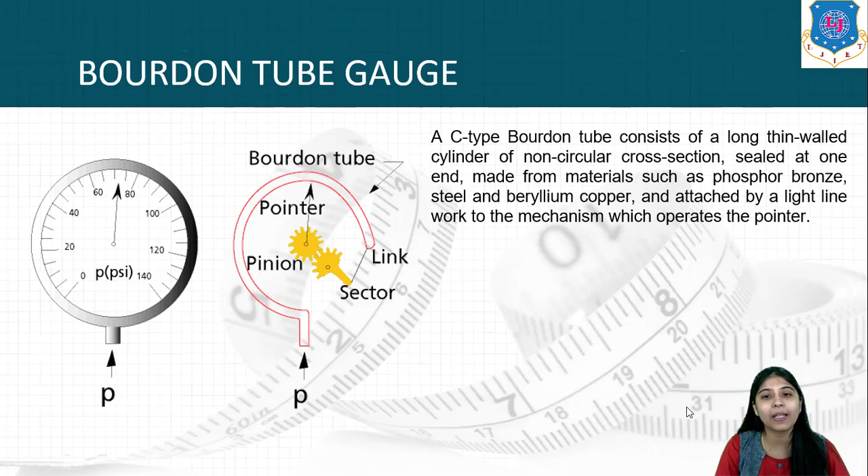A C-type Bourdon tube consists of a long, thin-walled cylinder of a non-circular cross-section, sealed at one end, made from materials such as phosphor bronze, steel, alloy steel, beryllium copper, and attached by a light linkwork to the mechanism which operates the pointer. The other end of the tube is fixed and is open for the application of the pressure which is to be measured.

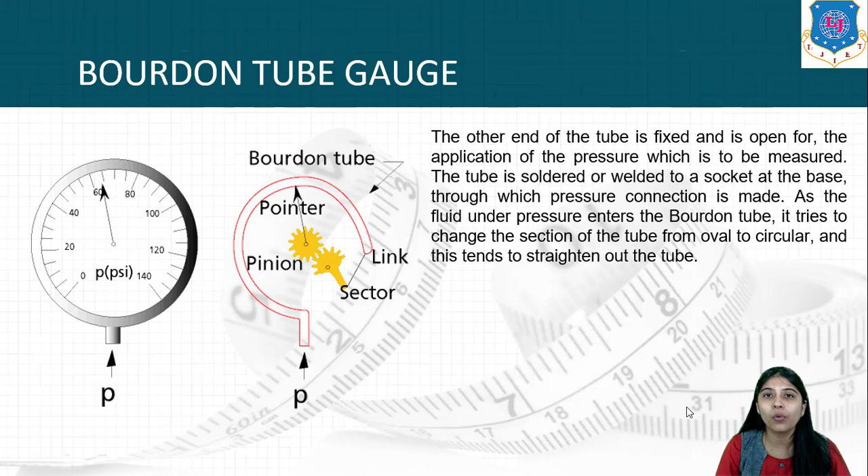The tube is soldered or welded to a socket at the base through which the pressure connection is made, and as the fluid under pressure enters the Bourdon tube, it tries to change the section of the tube from oval to circular, and this tends to straighten out the tube. The resulting movement of the free end of the tube causes the pointer to move over the scale.

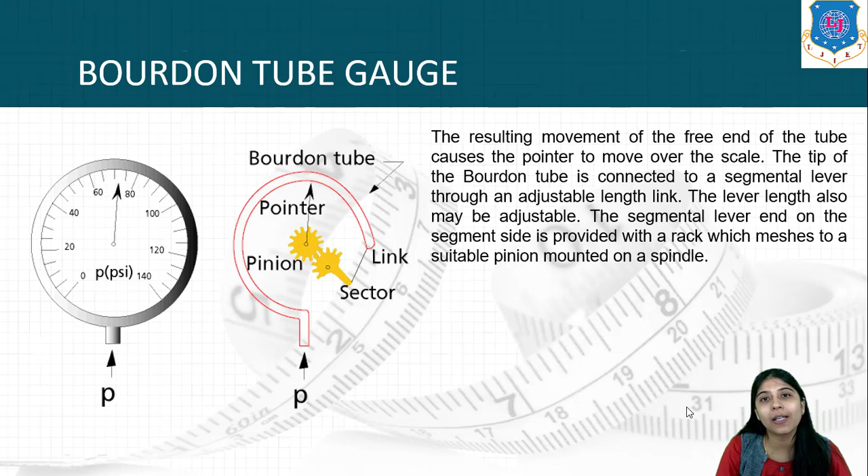The tip of the Bourdon tube is connected to a segmental lever through an adjustable length link, and the lever length also may be adjustable. This segmental lever end on the segment side is provided with a rack which meshes to a suitable pinion mounted on a spindle. The segmental lever is suitably pivoted and the spindle holds the pointer as shown in this figure.

Sometimes a hairspring is used to fasten the spindle to the frame of the instrument to provide the necessary tension for the proper meshing of the gear teeth, thereby freeing the system from backlash. Any error due to the friction in the spindle is known as lost motion.

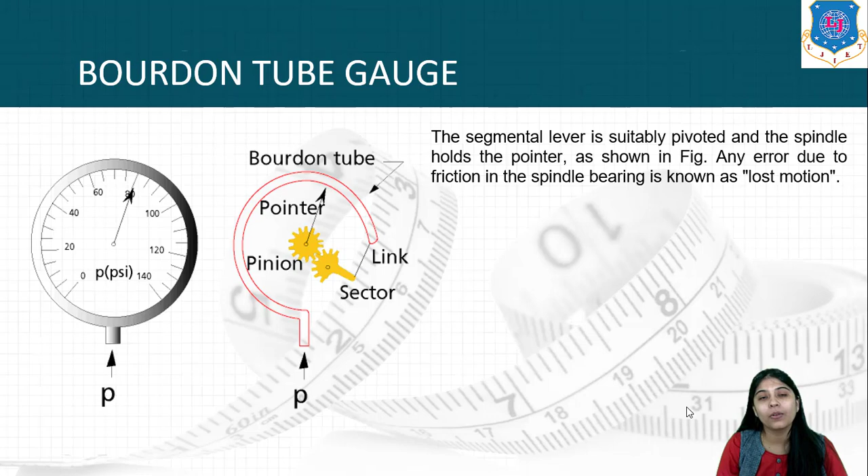These Bourdon tubes are made of a number of materials depending upon the fluid and the pressure for which they are being used, for example phosphor bronze, alloy steel, stainless steel, monel metal. For adequate reliability, the material for the Bourdon tube must have good elastic or spring characteristics. These tubes are generally made in three shapes: C-type, helical and spiral. So this is all about the Bourdon tube gauge.

Now let us move to the diaphragm pressure transducer. Diaphragms are widely used for gauge pressure, and they are also used for draft measurements, particularly in very low ranges. They can even detect a pressure differential in the range of 0 to 4 mm. The diaphragm can be in the form of flat, corrugated or disc plates. The choice depends upon the strength and amount of deflection desired.

In high precision instruments, diaphragms are generally used in pairs, back to back, to form an elastic capsule. With suitable modification, the diaphragm elements can be made to actuate an electronic circuit, thus converting the pressure movements to electrical signals that can be further detected, indicated or recorded by a system.

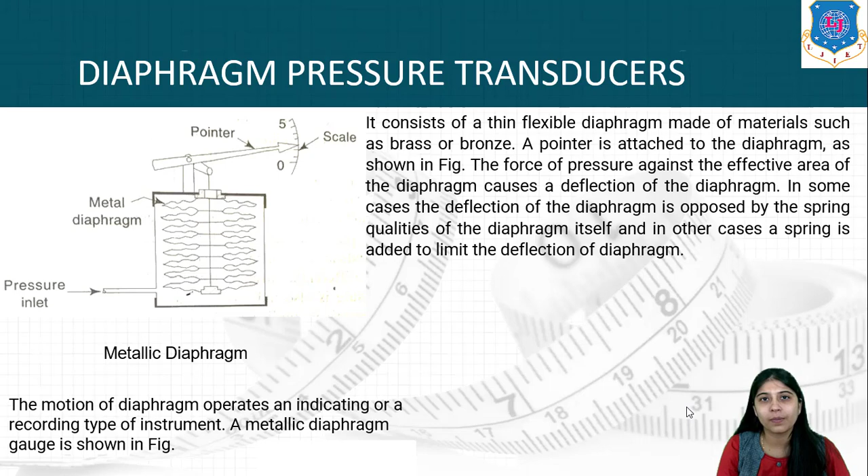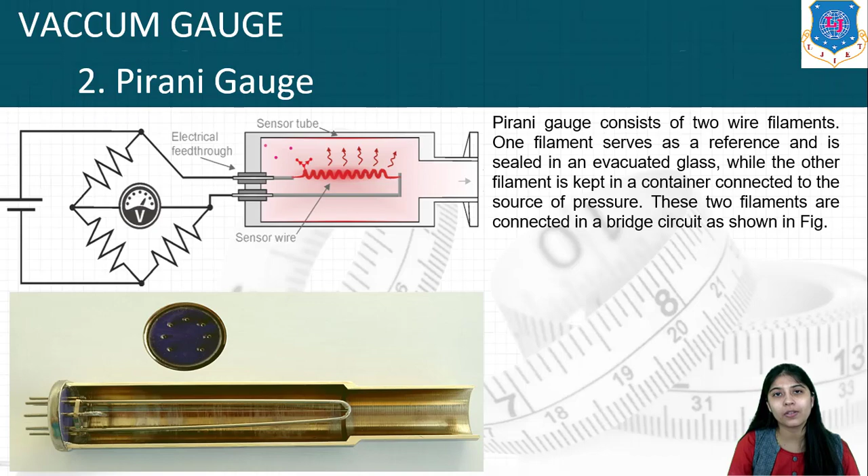Now let us see the operating principle of this gauge. If the resistances of the two Pirani elements are equal, then no current flows through the ammeter. But if the resistance of one Pirani element changes, then current will flow through the ammeter. So if you see any deflection in the ammeter, that means the resistance of one Pirani element is changing. This current flow indicates there is a change in pressure of the gas being measured. These Pirani gauges are used for the pressure range of about 10⁻⁵ to 1 torr.

So this gauge depends upon the electrical bridge and the ammeter, which shows the current change, and this current change indicates the change in pressure of the gas to be measured. Because different gases have different conductivity, this gauge must be calibrated for the particular gas that is to be measured. So this is all about the Pirani gauge.

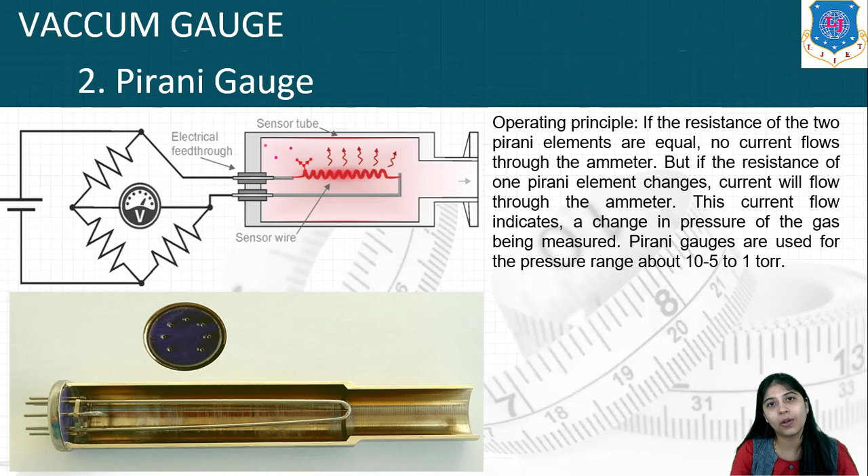McLeod gauge. The McLeod gauge is a measuring device that measures very low pressures, even down to 10⁻⁶ torr. This gauge is named after its inventor, Herbert McLeod. It was invented in 1874, and its shape is somewhat like a mercury manometer, which is the most common instrument used for measuring pressure. The McLeod gauge also has mercury in it, and the changes in the mercury level are used for the pressure measurement.

In today's world, this gauge is largely replaced by electronic vacuum gauges. The McLeod gauge works on the principle of Boyle's law, which states that if the temperature and the amount of gas remain constant, then the pressure of the gas is inversely proportional to the volume it occupies, that is, P1V1 = P2V2.

Now let us discuss some basic and important parts of this McLeod gauge. The first and most important part is the mercury reservoir, which is used to store mercury for the measurement of pressure in the McLeod gauge. Another important part is the piston, which is used to raise or lower the level of the mercury in the measuring capillary, bulb, reference column and reference capillary.

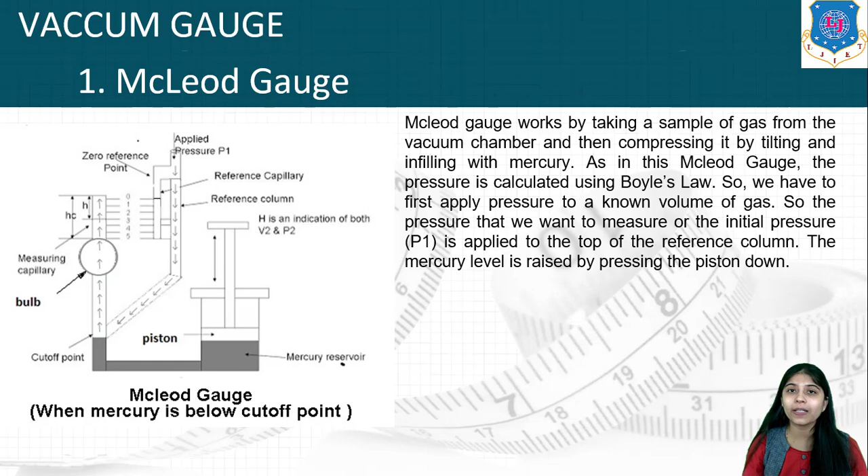As the piston is pressed down, the mercury level in the mercury reservoir decreases and the mercury level in the measuring capillary increases. The mercury level in the measuring capillary is brought just below the cutoff point, and at this point the applied pressure fills the bulb and the capillary. After the bulb and the capillary are filled, the piston is again operated and the mercury level in the gauge increases and reaches the cutoff point.

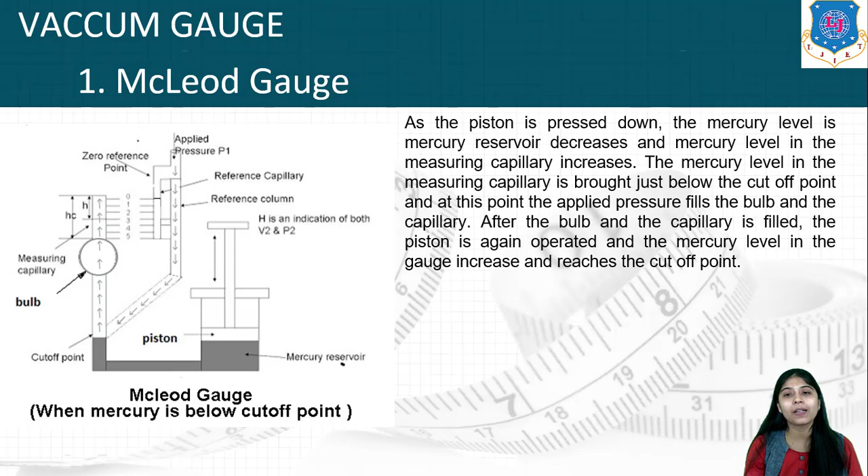When the mercury level reaches the cutoff point, a known volume of gas is trapped in the bulb and the measuring capillary. When we were increasing the level of mercury to the cutoff point, we noted the volume of the gas in the bulb and measuring capillary. This volume is called initial volume. Then the piston is again operated and the mercury level is further raised so that the trapped gas in the bulb and measuring capillary is compressed. The mercury level is increased until it reaches the zero reference point.

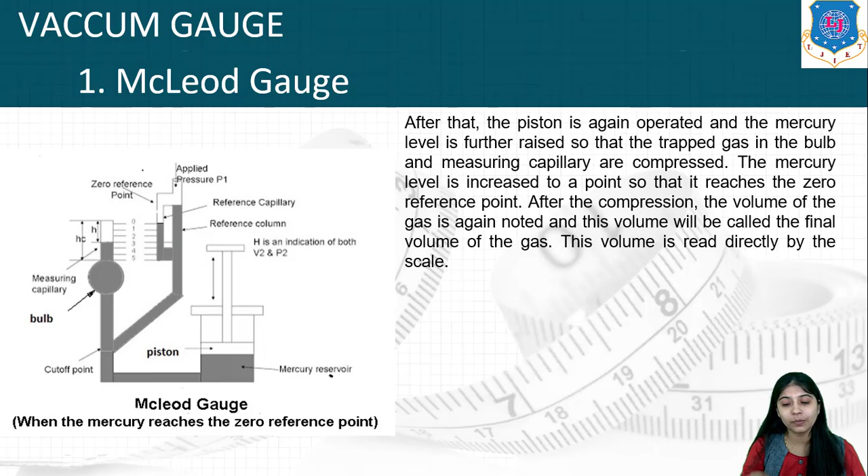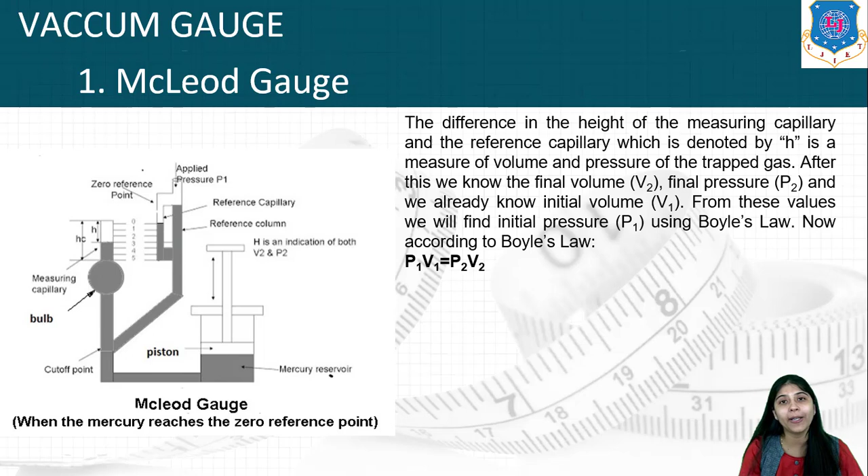After the compression, the volume of the gas is again noted, and this volume is known as the final volume of the gas. This volume is read directly from the scale, and the difference in the height of the measuring capillary and the reference capillary, denoted by H, is a measure of volume and pressure of the trapped gas. Now we know the final volume and final pressure, and we already know the initial volume, so we will find the initial pressure using Boyle's law. According to Boyle's law, P1 V1 is equal to P2 V2.

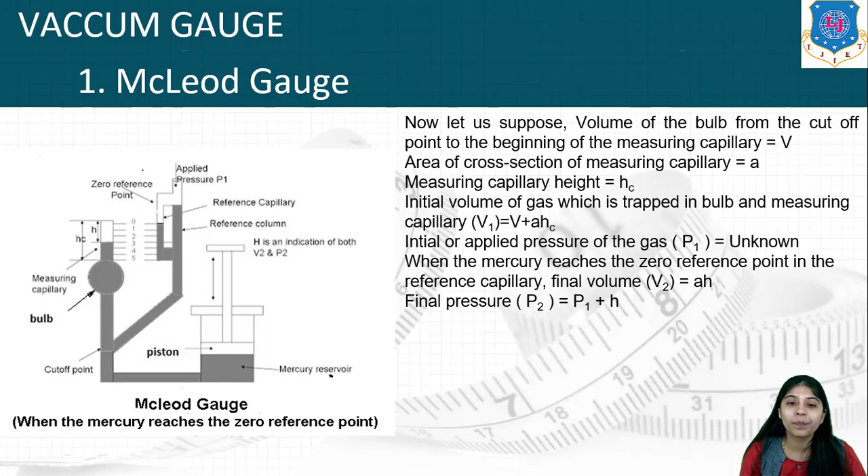Let us suppose the volume of the bulb from the cutoff point to the beginning of the measuring capillary is V. Area of the measuring capillary is small a. Measuring capillary height is HC. Initial volume of the gas trapped in the bulb and measuring capillary is V1, which is equal to V plus aHC. Initial or applied pressure of the gas is P1, which is unknown and to be measured. When the mercury reaches the zero reference point in the reference capillary, final volume V2 is equal to aH. The final pressure P2 will be P1 plus H.

Substituting all these values into Boyle's law, P1 V1 equals P2 V2, we get P1 V1 is equal to (P1 plus H) into aH, which gives P1 aH plus aH squared. So we can write P1 V1 minus P1 aH is equal to aH squared. Then P1 into bracket V1 minus aH is equal to aH squared. So P1 is equal to aH squared upon V1 minus aH.

Since a is the area of cross section of the measuring capillary, which is very small, and H, the difference between the measuring capillary and reference capillary, is also very small, the product aH will be very small and can be neglected. So P1 is equal to aH squared upon V1. In this way the initial or unknown pressure can be determined using the McLeod gauge. So this is all about this session.